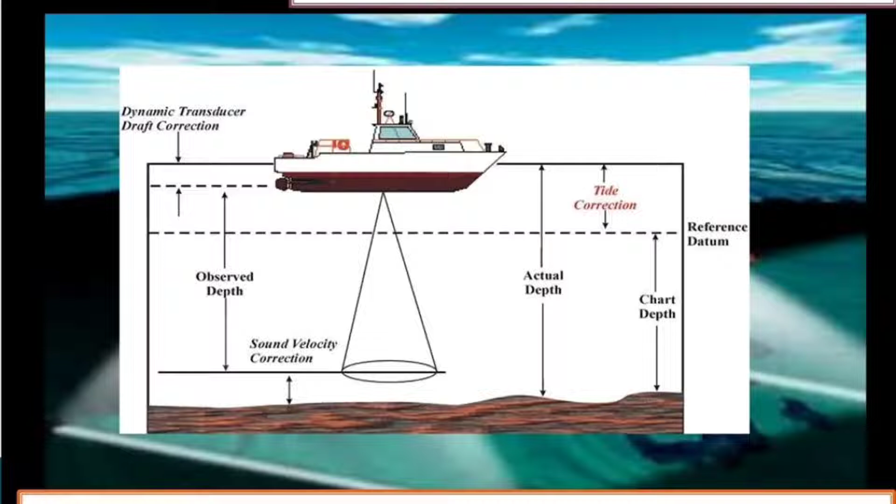Today we learn about hydrographic surveying, specifically sounding. Sounding is the process of determining depth below the water surface. The step before undergoing sounding is determining the mean sea level. Depth of sounding is referred to the water level at the time it is made.

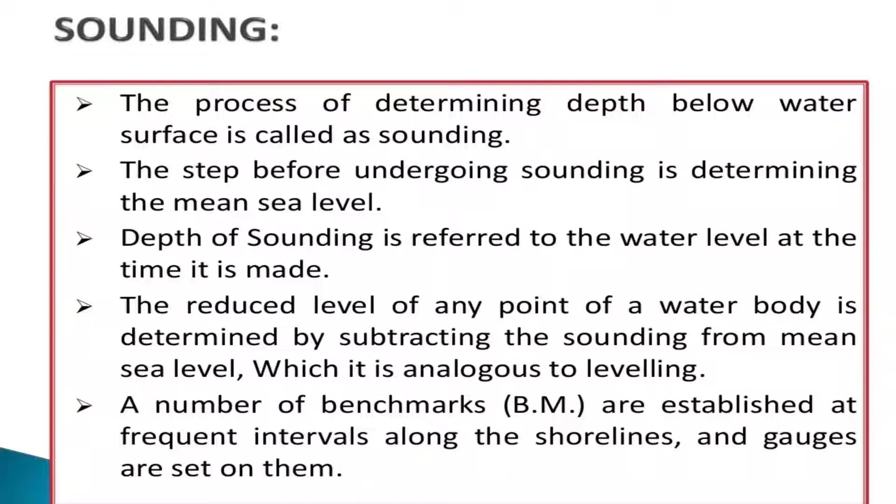The reduced level of any point of a water body is determined by subtracting the sounding from mean sea level, which is analogous to leveling. A number of benchmarks are established at frequent intervals along the shorelines and gauges are set on them.

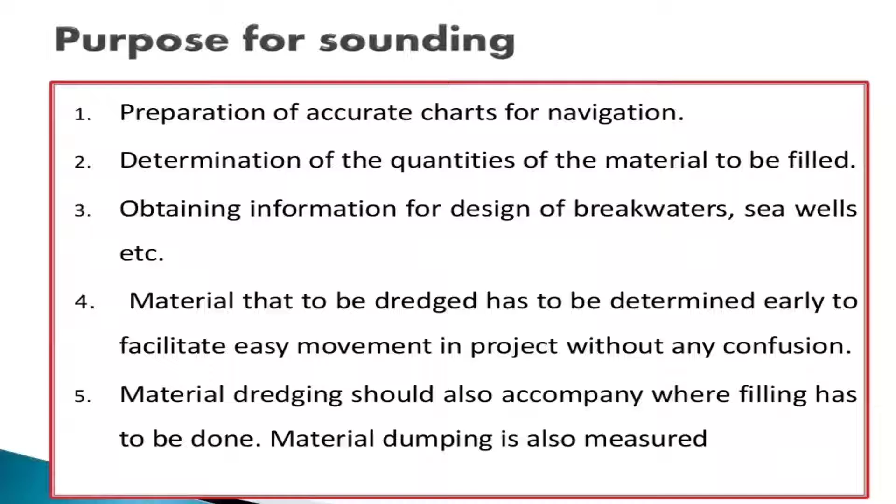Purpose of sounding: preparation of accurate charts for navigation, determination of the quantities of material to be filled, obtaining information for design of breakwaters, seawalls, etc. Material to be dredged has to be determined early to facilitate easy movement in the project without any confusion. Material dredging should also accompany where filling has to be done. Material dumping is also measured.

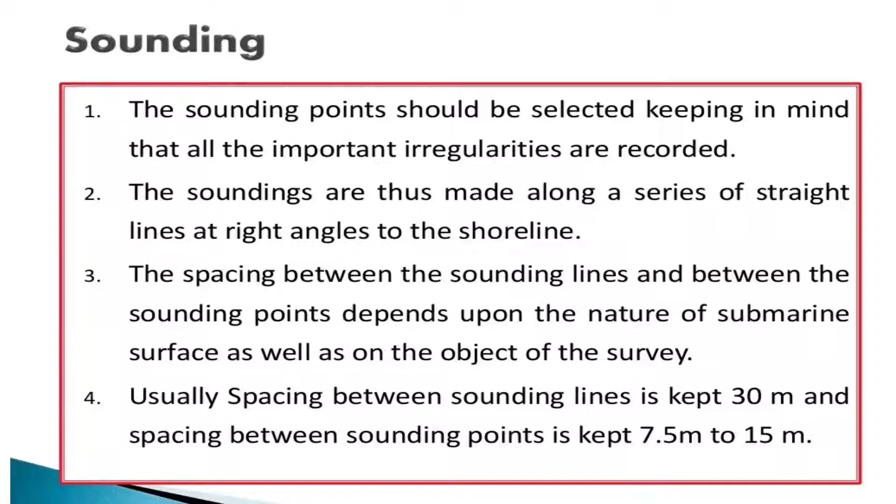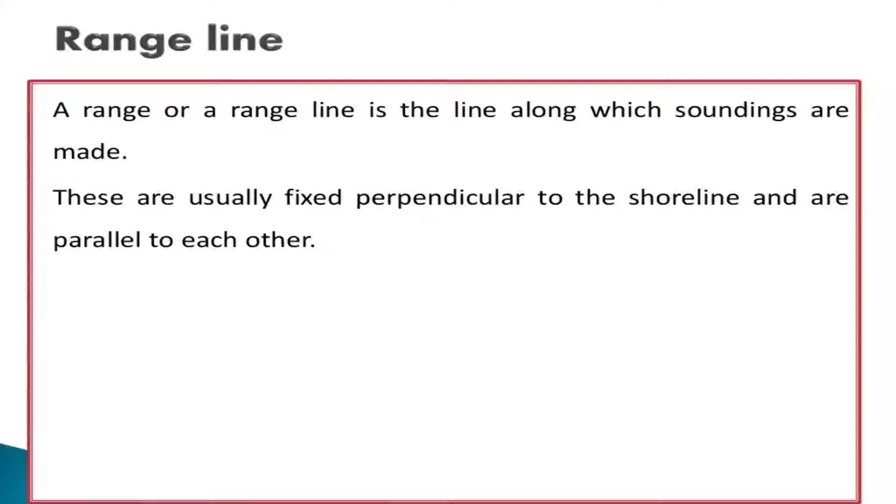Range line. A range or range line is the line along which soundings are made. These are usually fixed perpendicular to the shoreline and are parallel to each other. What are the equipments used for sounding? First of all, shore signals and buoys, sounding equipments, and angle measuring instruments.

Signal. It's used to mark range lines. Each range line is marked with two signals some distance apart along it on each shore. The signals are usually wooden tripods with a white and colored flag on the top. A buoy is a float made of light wood or a hollow airtight vessel properly weighted at the bottom and anchored in a vertical position by means of wires. In deep waters, the range lines are marked by a signal at shore and buoys in water.

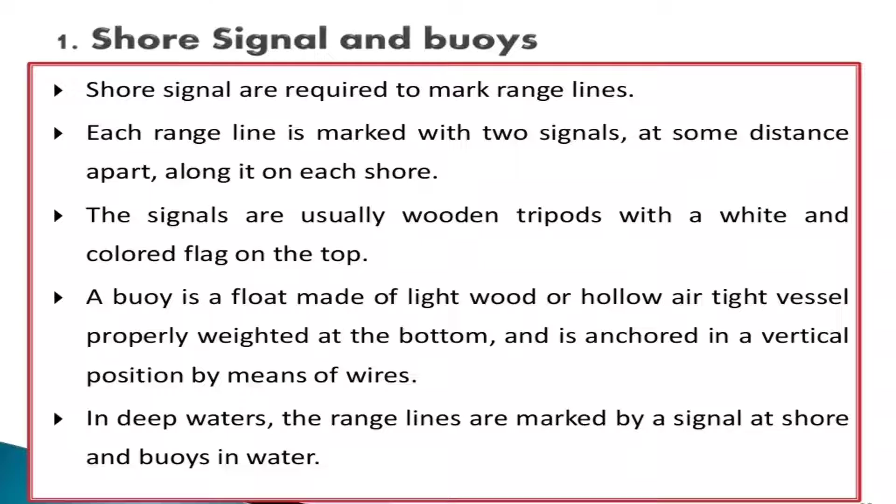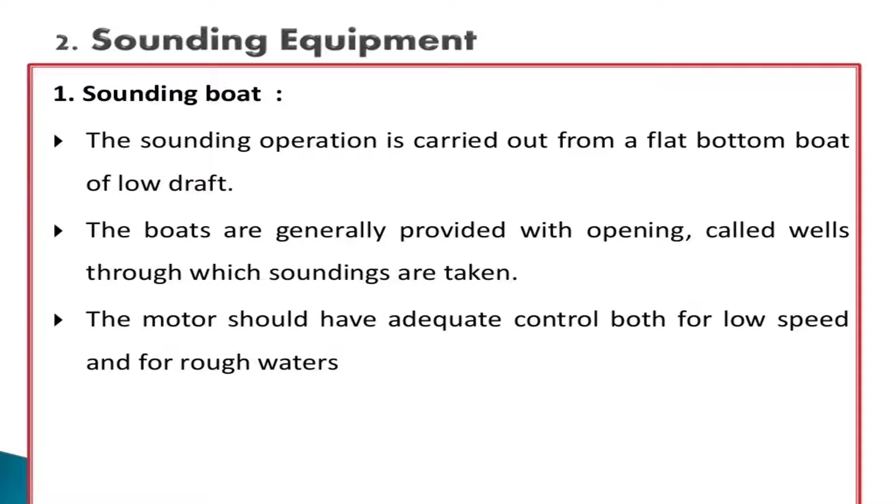Then sounding equipment: sounding boat, sounding rods, sounding machines, lead lines, fathometers. These are the equipments used. First of all, sounding boat. Sounding is carried out from a flat bottom boat of low draft. The boats are generally provided with openings called wells through which soundings are taken. The motor should have adequate control both for low speed and for rough waters.

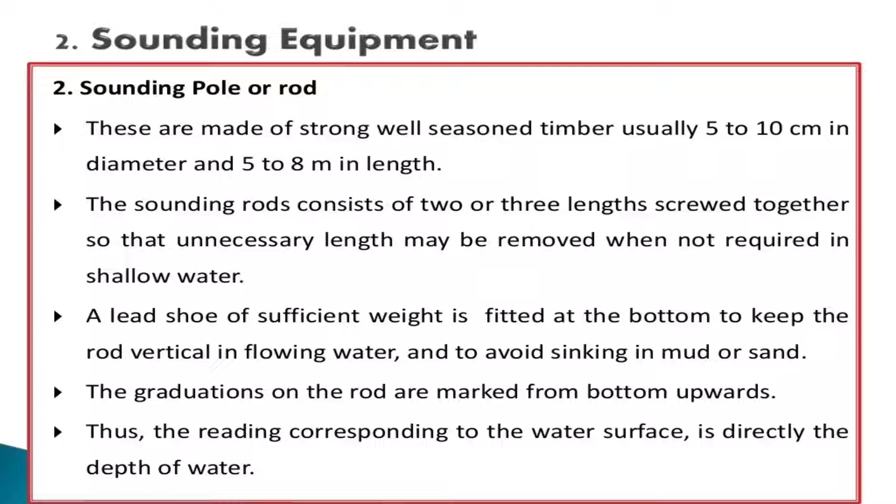Sounding rods are made of strong well-seasoned timber, usually 5 to 10 centimeters in diameter and 5 to 8 meters in length. They consist of 2 or 3 lengths screwed together so that unnecessary length may be removed when not required in shallow water. A lead shoe of sufficient weight is fitted at the bottom to keep the rod vertical in flowing water and to avoid sinking in mud or sand. The graduations on the rod are marked from bottom upwards. Thus, the reading corresponding to the water surface is directly the depth of water.

Then lead line or sounding line. It's usually a length of cord or tiller rope of Indian hemp or braided flax, or a brass chain with a sounding lead attached to the end. Due to prolonged use, a line of hemp or cotton is liable to get stretched. To graduate such a line, it is necessary to stretch it thoroughly when wet before it is graduated. The line should be kept dry when not in use. It should be soaked in water for about 1 hour before taking soundings. The length of the line should be tested frequently with the tape.

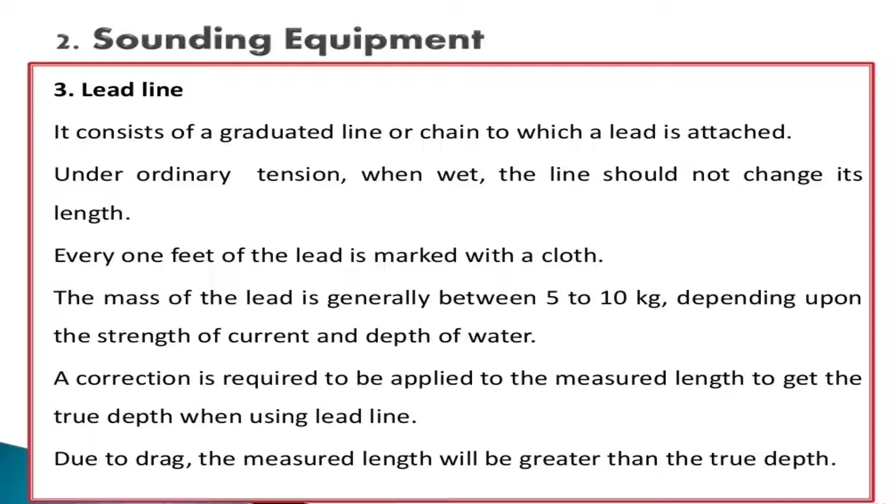For regular sounding, a chain of brass, steel or iron is preferred. Lead lines are usually used for depths over about 6 meters. The mass of the lead is generally between 5 to 10 kg depending upon the strength of the current and depth of water. Every 1 foot of the line is marked with cloth.

Next, sounding equipment is an echo sounding machine or fathometer. It's a common method where the depth of water is too much. It measures the depth below the boat on which it is installed. It works on the echo property. It consists of a transmitting and receiving oscillator, recorder unit, and power unit.

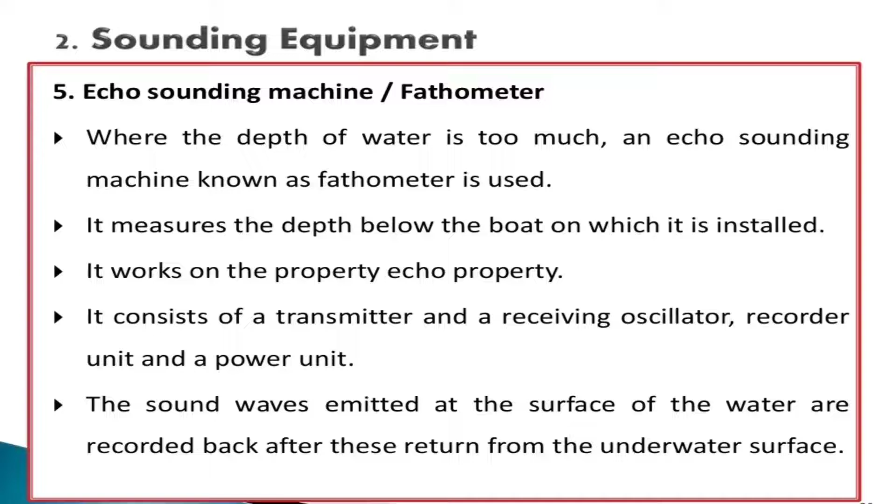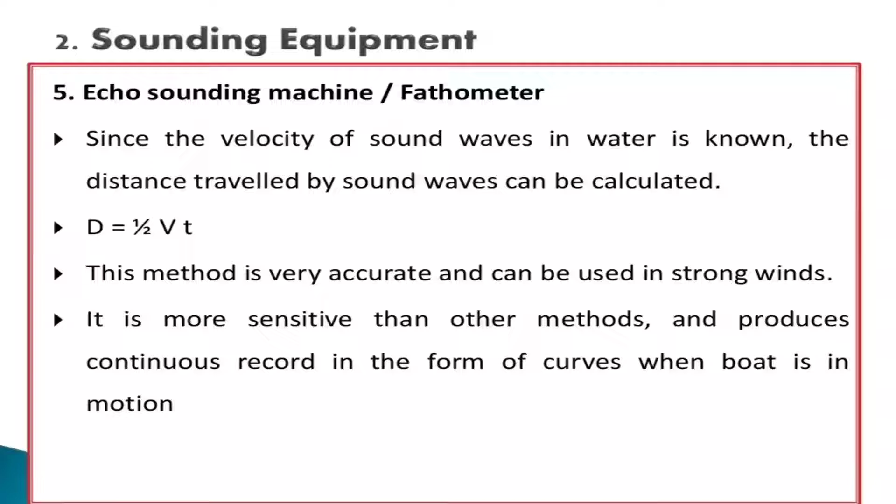The sound waves emitted at the surface of the water are recorded back after they return from the underwater surface. Since the velocity of sound waves in water is known, the distance traveled by sound waves can be calculated. The formula is d = 1/2 (v × t), where v is the velocity and t is the travel time. This method is very accurate and can be used in strong winds. It's more sensitive than other methods and produces a continuous record in the form of curves when the boat is in motion.

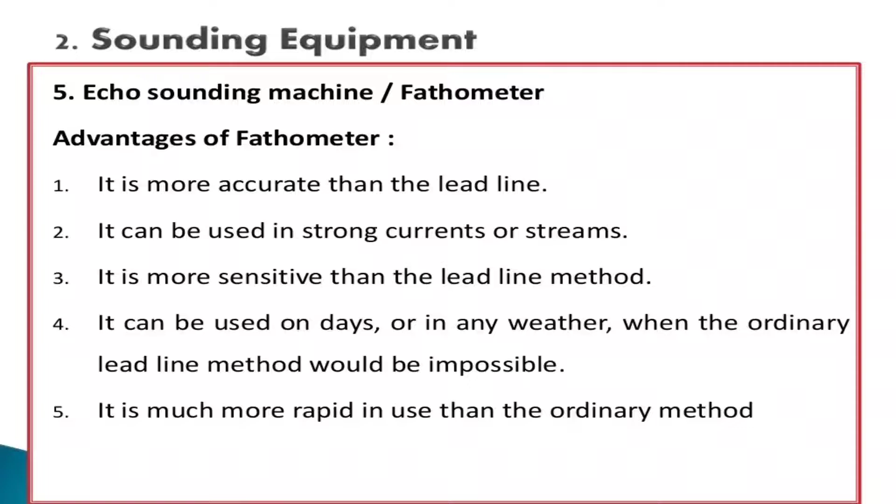The advantages of this method: it is more accurate than the lead line. It can be used in strong currents or streams. It is more sensitive than the lead line method. It can be used on days or in any weather when the ordinary lead line method would be impossible. It is much more rapid in use than the ordinary method. This is the fathometer method.

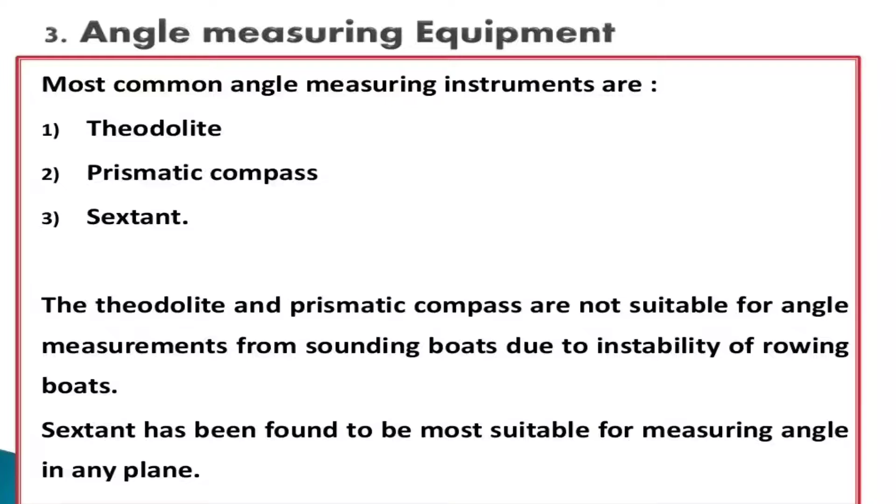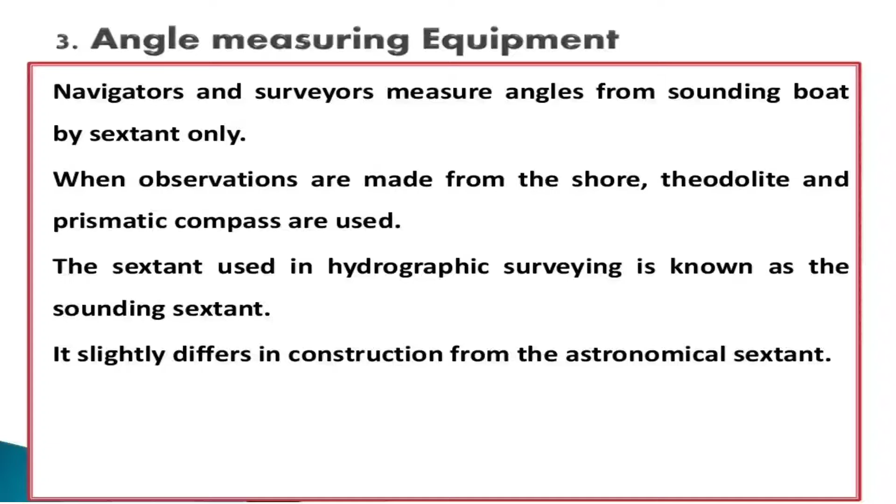Third, angle measuring instruments. The most common are the theodolite, prismatic compass, and sextant. The theodolite and prismatic compass are not suitable for angle measurements from sounding boats due to instability of rowing boats. The sextant has been found most suitable for measuring angles in any plane. Navigators and surveyors measure angles from sounding boats by sextant only. When observations are made from the shore, theodolite and prismatic compass are used. The sextant used in hydrographic surveying is known as the sounding sextant. It slightly differs in construction from the astronomical sextant.

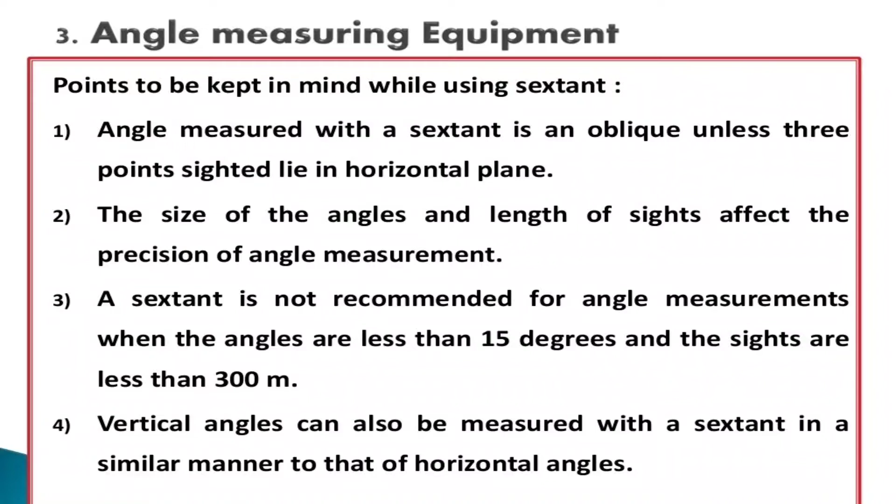Some points to keep in mind while using the sextant. The angle measured with the sextant is oblique unless the 3 points sighted lie in a horizontal plane. The size of the angles and length of sight affect the precision of angle measurement. A sextant is not recommended when the angles are less than 15 degrees and the sights are less than 300 meters. Vertical angles can also be measured with the sextant in a similar manner to horizontal angles. Thank you.